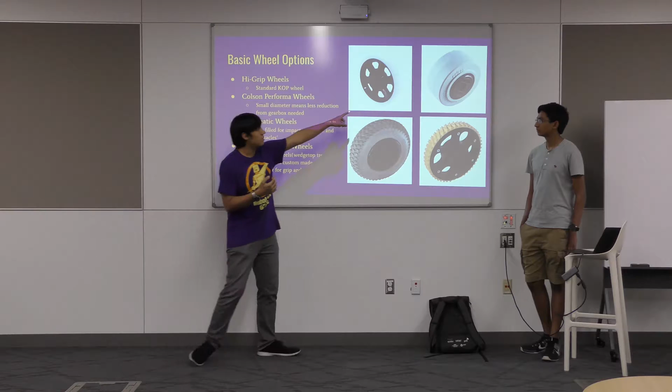In terms of wheels, there are tons of types out there. What we have in the robot, what we've used previously for the most part, are the high grip wheels, which are these ones right here. The diameter varies to 4 or 6 inches, but the important thing is at the outside there's a rubber tread, and it's really high grip, good for traction.

Then there are Colson wheels. They're generally smaller and have a lot of different width options. They're also fairly high traction.

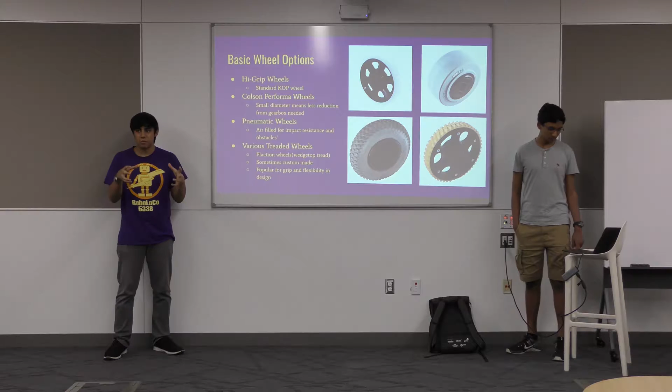Pneumatic wheels — these ones right here — are what they sound like, they have air filled inside of them. Chassis with pneumatic wheels can withstand a really big bump because they can bounce a little bit, so depending on the challenge, you might want that.

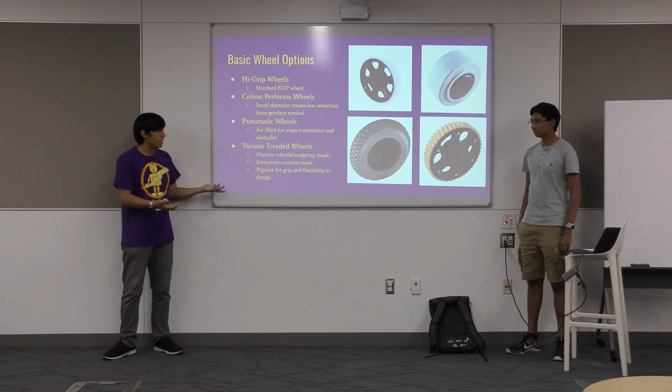You can put whatever kind of tread you want on certain wheels, not only for your chassis, but for other stuff as well, depending on the surface.

The first and most basic drivetrain we're going to look at is the tank drive. It works like the tank style of control, where you have the left side working together and the right side working together.

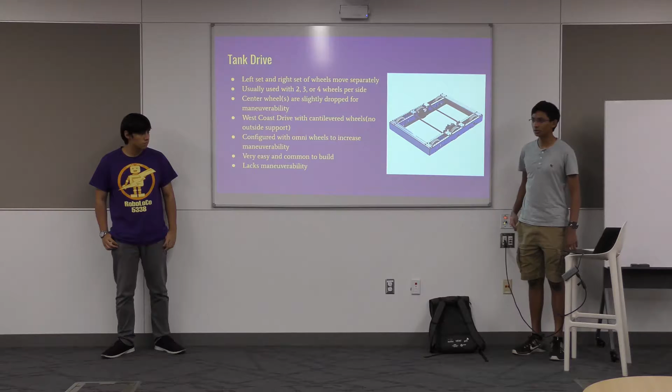So one joystick will be paired to each of them. Usually the center wheel is dropped slightly more than the other two, so you don't have too much friction on the ground at one time, and it helps with turning.

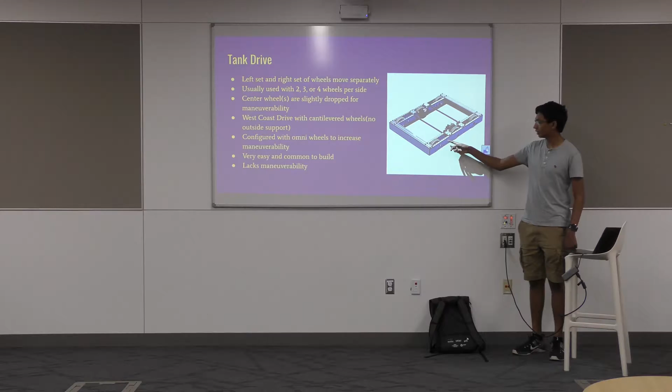There's another style of drive called the West Coast variation of the tank drive. It's what we normally use, where instead of having this side plate, it's just left open, so the axles are just put at the end. Sometimes, if the challenge requires it, we can put omni wheels on the ends, and that will allow you to turn a lot easier as you don't have as much friction from that side.

The advantages of this type of drivetrain are that it's very easy and common to build, and there's lots of resources for it. But the issue with it is it lacks maneuverability, as it's a lot harder to control for the driver. It's also pretty high traction depending on the wheels that you use.

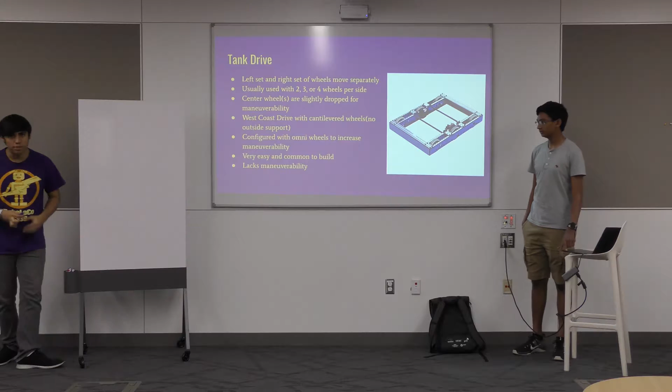And what Ritwik said about the center wheels being lower, center drop is pretty common. The way it works, just real quick: if this is the side of your chassis, if you put your center wheel lower, and then these two outside wheels slightly higher, whenever it turns, only the two wheels in the center are going to be touching the ground.

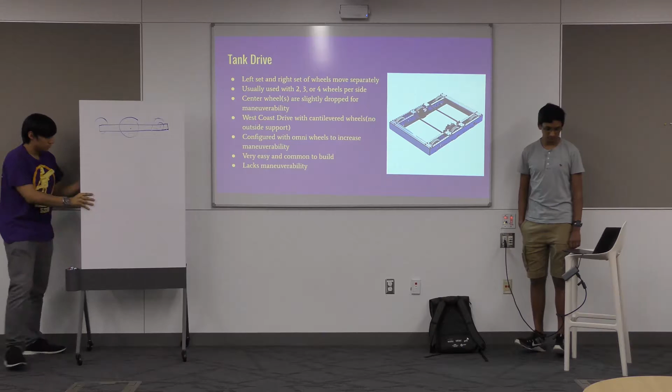And so that's what he means by it'll be easier to turn. It'll give you that slight maneuverability, and then these two wheels only engage forward and backward. So it's a way to kind of make tank drive a little bit more maneuverable. And then you can configure tank drive with 2 wheels on each side up to 4 wheels on each side, depending on what you want.

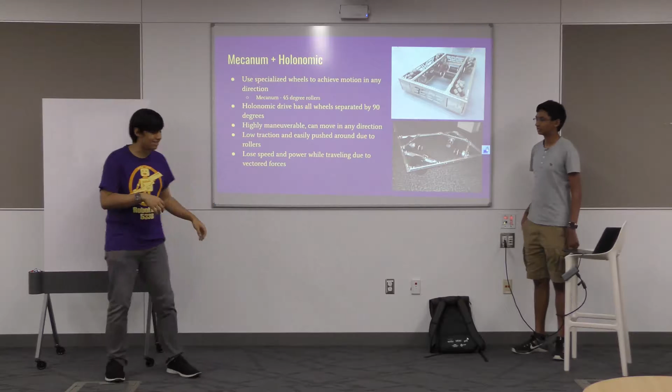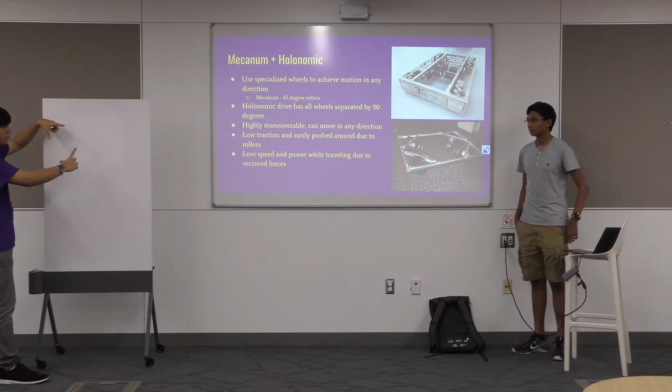Basically, because they're at a 45-degree angle, by using different combinations of them on each corner, you can make your robot move in a lot of directions. Essentially, you can keep your chassis oriented one way, and by turning your wheels forward and backward and side, you can get it to slide around. Yeah, it can move and turn in any direction, and you can move while you're turning too, so you can do arcs and stuff around the field.

Yeah, so it's high maneuverability. The problem with Mecanums is that your chassis has to be really flat. It can't be slightly bent, which might happen as a result of the building process. We've tried it before, it's a bit difficult on our programmers as well.

Holonomic drive is a similar idea, except instead of using Mecanum wheels, which have the 45-degree angle, it uses omni wheels, which are basically the exact same thing, except instead of being at a 45-degree angle, it's in line with the tread. It's just 2 sets of wheels with little rollers following the direction of the wheel, and it achieves the same effect, except it takes a little bit more internal space. So it's a bit easier to do than the Mecanums, I think.

But here all of the wheels are 90 degrees to each other, one in each corner. So like we said before, high maneuverability, but they get pushed around really easily. That's why we might not always want them, depending on the challenge. We have to really settle into a role if we wanted to use these. And with Mecanum, if you're moving sideways, you're turning the wheels against each other, so you lose a lot of force to friction, and it's a lot slower.

Oh yeah, so swerve drive, some of you might have seen the modules earlier. It has the ability to rotate the wheel 360 degrees while also spinning the wheel at the same time. So it gives you the same range of motion as the Mecanum wheels, except since the wheel is spinning to go with the direction that you want, it gives you full power in that direction, so you don't lose any traction or power. So you can play defense just like a tank drive, essentially, except still have the maneuverability of a Mecanum or holonomic. The issue with this is it's a lot more difficult to implement, a lot more complex, so we haven't really used it yet.

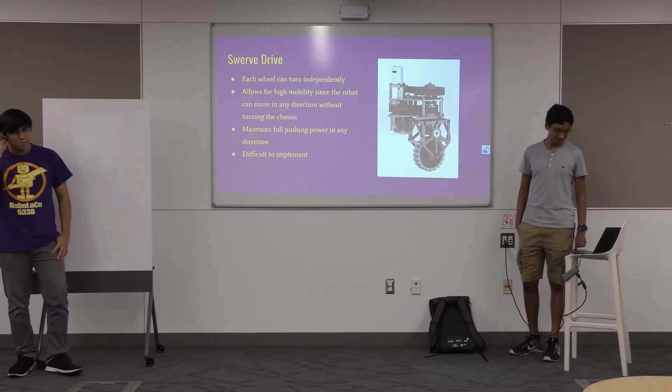Yeah, we've tried to use it in one of our off-season competitions. That's one reason the off-season competitions are really useful, is because there's no actual consequence to losing or winning or whatever. So we can really try out different concepts during them.

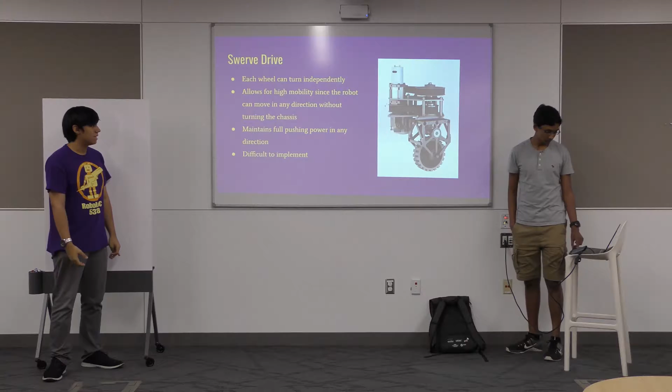And in this case, swerve drives are pretty expensive, and they're really difficult to implement, in terms of the coding and the building and all the design that has to go into them. But if a team makes a good swerve drive, it can really help them during the competition.

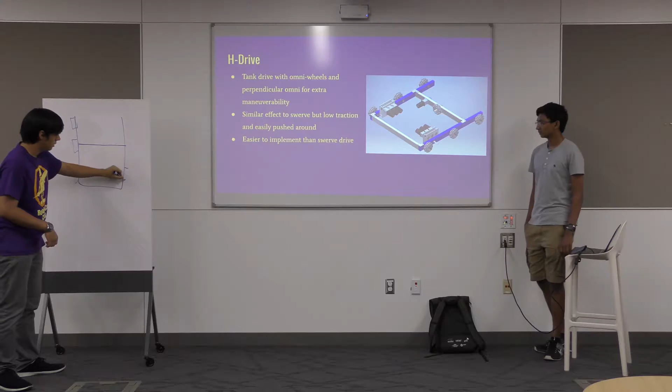And H drive - we've talked about omni wheels before, and essentially the reason it's called H drive is because if I have my chassis like this, there's a wheel here, wheel here, wheel here, wheel here, wheel here, and then there's a wheel sideways in the middle.

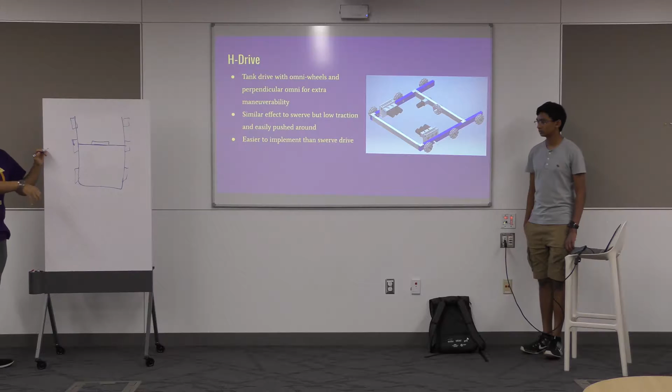Since omni wheels have rollers facing into the direction of the wheel, they have traction going forwards and backwards, but no traction side to side. That's why we have the sideways wheel - also an omni wheel. It can move side to side, but not forward and backward. So in this case, you can get away with this and have many angles covered.

Downsides to this, I would say, are you lose a little bit of space with the middle wheel, but you do get a lot of maneuverability with it. It's really easy to make, but you don't have high traction, so you'll be a pushover, literally, if you make this chassis.

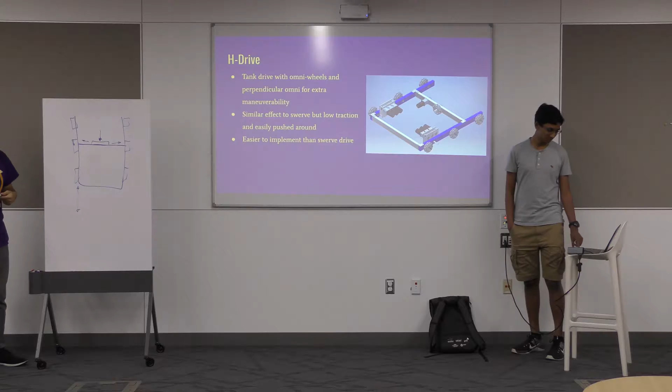Then there's a lot more exotic drivetrains we can look into. These use pistons that push down a system with two wheels - one wheel is usually like an omni wheel or Mecanum wheel, and the other is traction. So it gives you tank drive, but you can switch into omni or Mecanum drive.

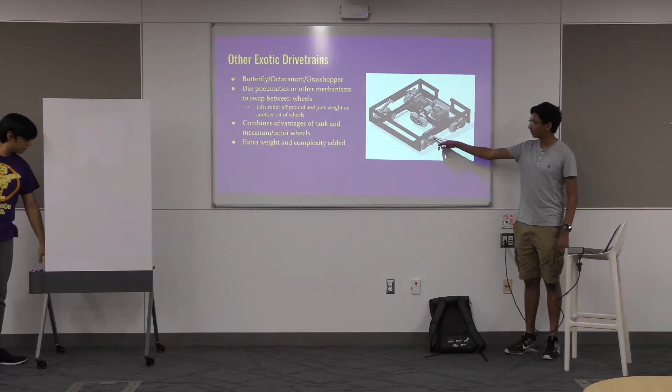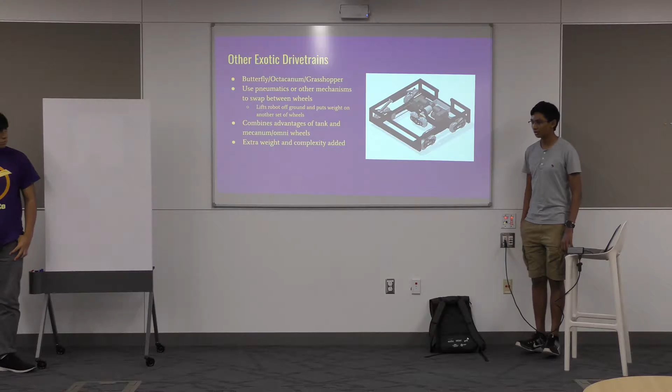With these wheels being pushed down, it lifts the rest of the robot up a little bit higher. So it gives you both the tank drive, and if you want to switch to mecanum or omni, you can do that. The issues with it are it's really complex to implement, and there's a lot of extra weight that comes along with it.

Yeah, so if you look at it, it's extremely bulky. Unless you need this for your strategy, we probably wouldn't do it, just because we don't have that much experience with it either.

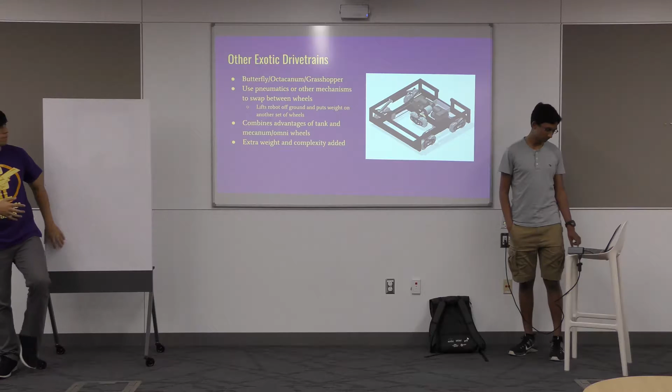With the hopper, you want to guide the balls - you can have it gravity fed where the bottom slopes down to one corner, and that's where the shooter is, so the shooter can pick up the balls from there.

Or a lot of teams have active methods to move the balls around and serialize them. One way is a series of belts that go along the length of the base of the hopper, pulling the balls to one side. Or some teams have a giant rotating sweeping arm around the base that pulls the balls to one side or corner.

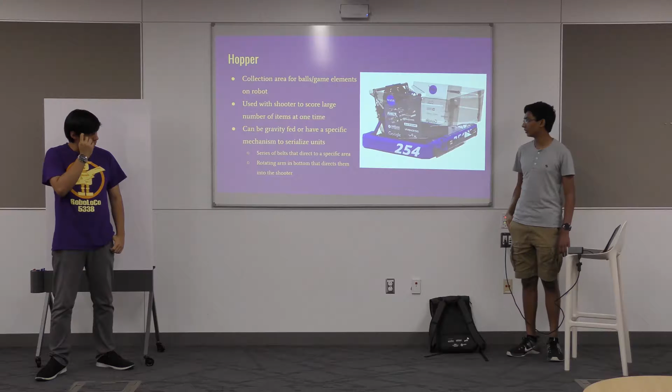One thing to keep in mind: you can have a ball shooter, and it's pretty easy to make - you just get the wheels spinning, feed the ball, and shoot it. But this is all about how do we get the balls to that place in the first place.

With a hopper design, a passive hopper just exists and funnels balls into one place. The way you'd get balls into this is usually from some sort of loading station. In past games, to put game pieces onto your robot, there's usually some place where a human can put pieces into the robot. Sometimes the balls fall to the ground, and this would not be a good design for that because of how it's designed. But we'll get to that next.

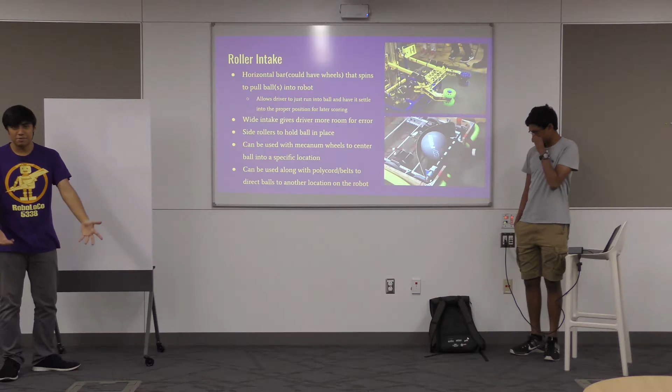If you want to pick up from the ground, because a lot of times the balls will fall onto the ground, you want to use some sort of roller intake.

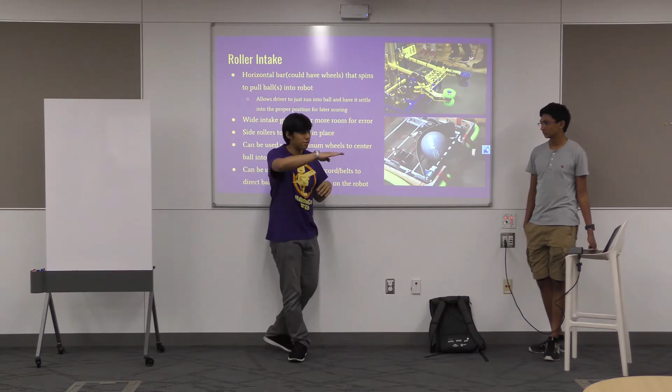In terms of a horizontal bar, that would be this one - a bar placed parallel to the ground, and it spins, and it's at the height of the top of the ball. So when any ball rolls into it, it just gets sucked into wherever you want it to go, and that could feed into some other system.

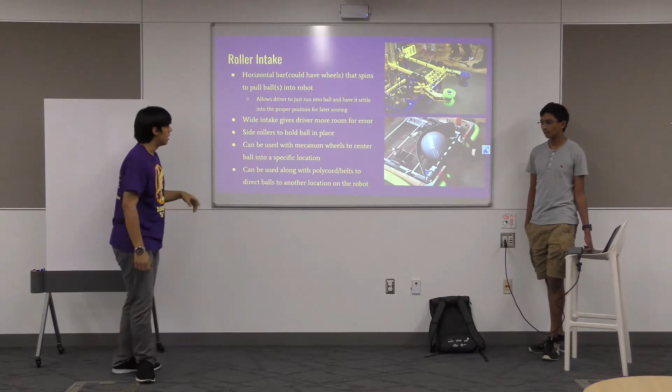A wide intake is really useful because you don't have to be that precise. Driving the robot isn't the easiest thing, especially if you can't see where it's going too well. So this intake is slightly wider than the ball, just so the driver can be pretty confident in their driving.

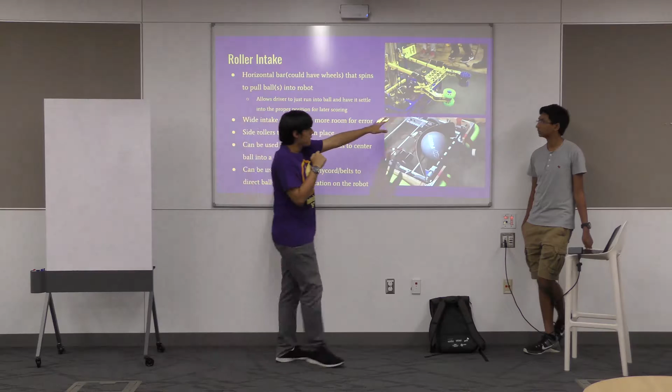Side rollers, like this, can be useful for balls, but also for larger things. If you want to pick up a single object at a time and raise it up high, you would use something like that. It's pretty versatile in terms of what you can use it for, and it's not the most difficult thing to build.

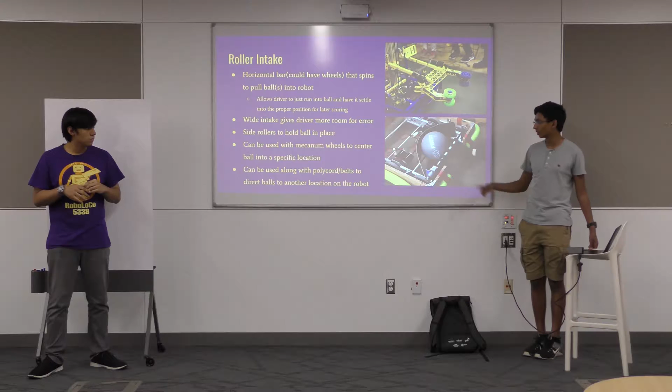With both of these, you can substitute a plain bar that has some sort of grip on it, like a PVC pipe. You can put compliant wheels on it, those rubber wheels we saw earlier that grip the ball. Or you can use mecanum wheels, which help center it to a specific point. A lot of teams use this in conjunction with this type of intake, so it sucks it straight into the robot, and this holds it to a specific position, which helps with scoring.

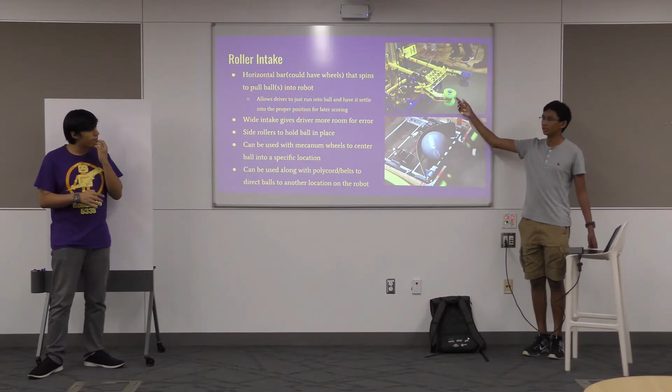There's another variation of this called an over-the-bumper intake. That will actually extend out of the robot, using the bumpers as a back surface to pull the ball up. That helps with saving space on the robot, as you can move your holding mechanism further to the front and have the intake on the outside.

If you have your ball or scoring element in place, you want to be able to move it to a higher position. You would use something like an elevator or an arm. First is elevators: the goal of an elevator is to raise a series of stages vertically in one axis, using a system of pulleys with either chain or some sort of cord.

One issue with elevators is that the stages can sometimes bind up because of the weight and friction between the bearings and the bars. So sometimes we use a constant force spring, a piece of bent metal that pulls down with a certain force. This opposes the force of gravity on the elevator parts and makes it easier to lift up and down by the motor.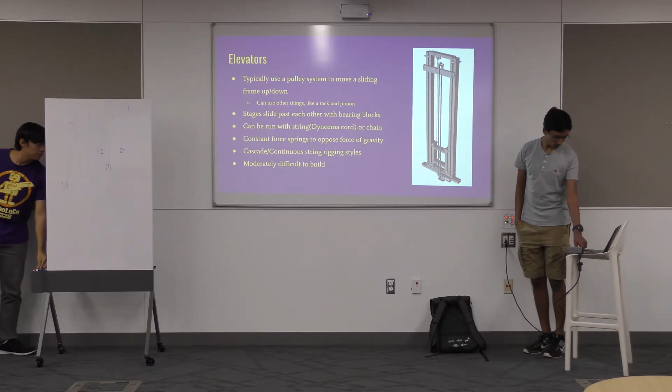And arms. Arms are an alternative to an elevator, depending on how you want to make it. They can be made out of metal, polycarbonate, whatever.

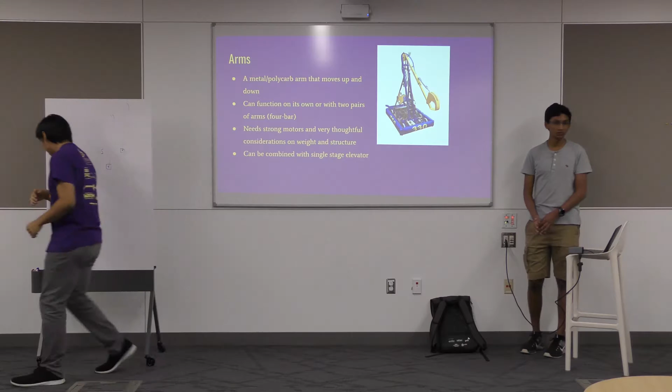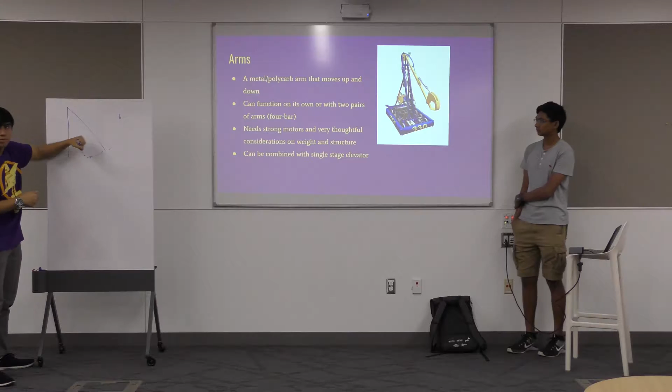So what that second bullet point means is that you can either have a single arm, or you can be clever with arms. You can have one arm, and this arm can swing up or down. But if I have a mechanism attached on the end of this, the face of it will change to whatever angle the arm's at.

If I have 2 arms, and I attach a plate to the end, and both of these can roll while the whole thing goes up and down, which is what we did on a robot this past year, this end plate will stay at whatever angle you set it up in. We set up ours to be perpendicular to the ground, so it would always face like this. With 2 pairs of arms, you can achieve that.

This is called a 4-bar mechanism, because from the top view there are two bars per arm, and then there are 2 sets of this.

One of the advantages is it's not hard to build, you just have a strong motor and an arm, and you're done. But the motor has to be strong. You're going to make your arm as light as possible, because the more weight you put on the end of the arm, the harder it is to control, and the stronger your motor needs to be. There are limits on all that.

So there are good sides and downsides. We went for it this last year because it was really simple to build, just a motor and the bars, but it had its own problems. You can combine arms with a single stage elevator, depending. You can have an elevator and a small arm on the elevator, or however you want, combining a lot of these mechanisms together.

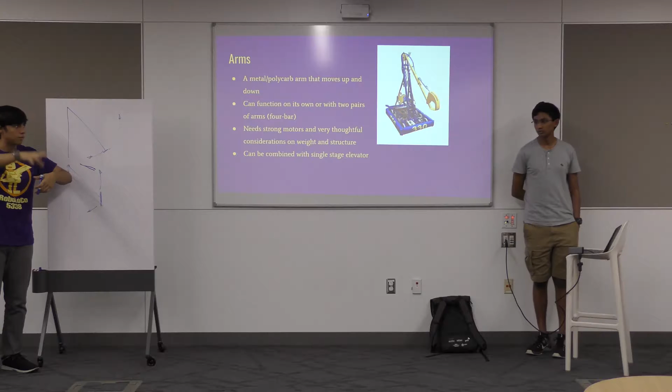So as homework, we will send out links on Slack for a bunch of robot reveals and sources where you guys can get inspiration for your own mechanisms. Start thinking about this, because we don't want to just tell you guys, hey, if you had this challenge, what would you do, without at least getting some exposure to previous challenges first. We're going to give you some challenges, nothing too complicated, and just throw out any ideas or discuss among yourselves what you'd do for this challenge.

So, number 1, the challenge involves taking a large cube and being able to score it in several locations of varying height. So you have a cube like this, and you have to put it on different platforms. The higher the platform, the more points you get, and the more cubes per platform, the more points you get.

Let's do this: bottom one is 2 points, middle one is 4 points, top one is 12 points. What kind of chassis sort of thing, what kind of mechanism would you want to do? Let's give some heights: this is 0 feet, this is 3 feet, this is 6 feet.

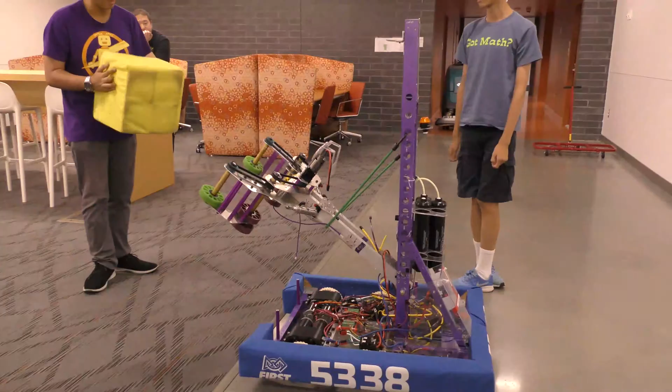This view was loosely based on the challenge from two years ago. So here's a cube, you're supposed to catch it. Okay, all right. But this was our robot for that challenge, so here you can see some of the things that we did. What are some things you recognize on the robot?

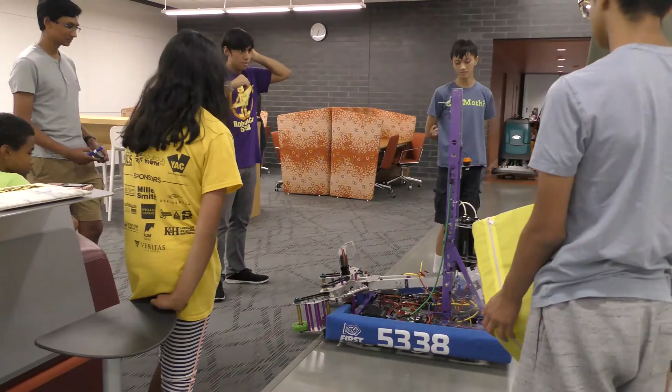Compliant wheels. Yep, what else? What about the chassis? What do you notice? Just a standard tank drive. It is a tank drive. Does anyone know why we'd have omni wheels on the back?

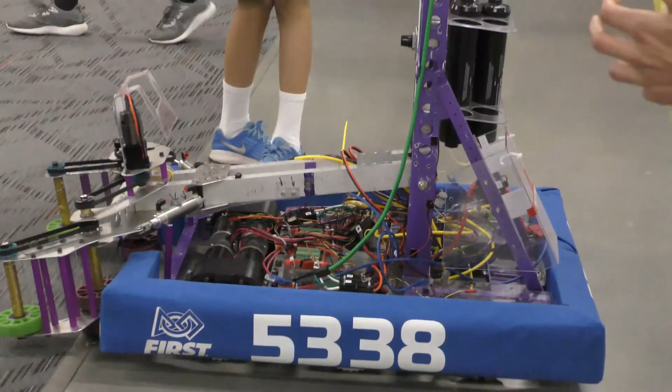So usually when we do a tank drive, we have the center dropped, right? So that way when it turns, it turns really quickly. In this case, we didn't have that. So why would omni wheels help with that?

Because of the wheels. Yeah, the wheels don't have any friction side to side. So the correct term is wheel scrub. When you have 6 wheels and you try to turn, the wheels will literally scrub across the ground. That's what is preventing wheel scrub. And it worked pretty well.

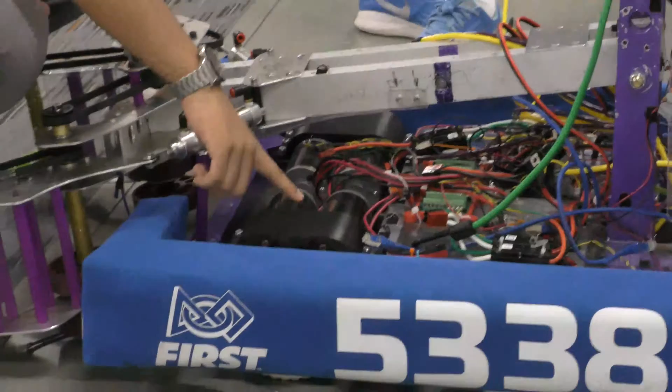And in this case, you can see we just have the 4 motors, and they're driving each side. This chassis uses belts across the whole thing. You can see them under there to just connect each side up. In the front here, you can see in more detail the compliant wheels.

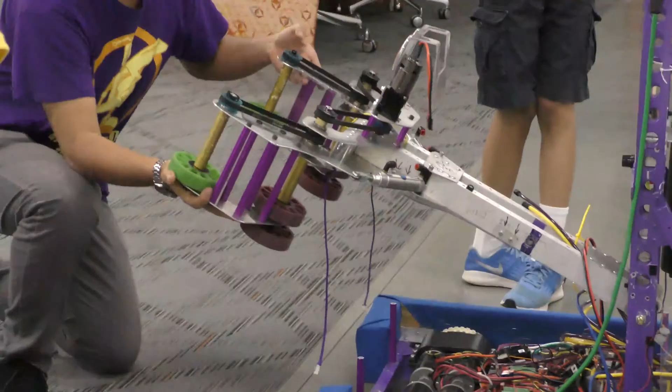So what we had in this case were a motor on each side. They spin the wheels in and out. These pulleys on the end are 3D printed. And we use that to grab the cube.

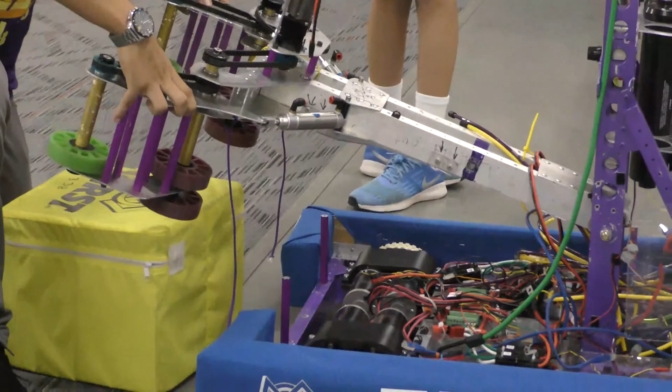So when closed, we have pistons out here, right? This is what I was talking about a little bit with the pistons. So when the piston is fully retracted, it's open. When it's fully extended, it snaps into place. And that was able to just drive up into the cube. Because the wheels are fairly big here, we didn't have to be super accurate with the motion because it would just sort of suck the cube into the right spot.

But yeah, so you guys thought of a robot more or less like this. A lot of teams used an elevator. We did not. And we fixed it a little bit by shooting the cubes instead. It wasn't perfect though. So that's what a robot for a similar challenge would look like. Anyone have any questions on the process or anything?

Let's just pretend that's the thing, and then we have 3 foot, 6 foot, 8 foot. The field, same thing, each driver on either side, and then in the middle, there is one pole for this side, and then there's another pole for the other side.

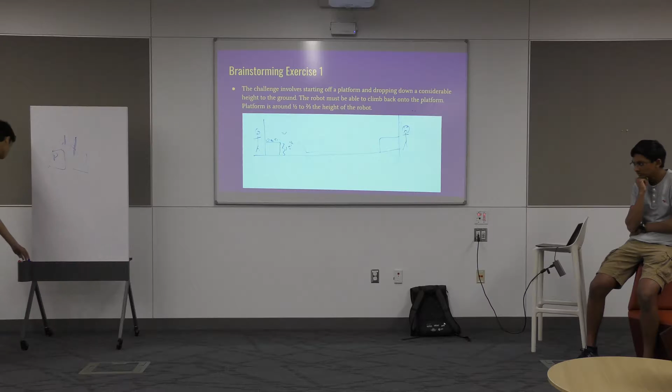Just simply add something like here, and then add, and if you had the arm here, it would just kind of extend and then maybe push against the ground. Yeah, push it against the ground.

Could you use pistons on the bottom of it to push off the ground? You can use pistons. How would that look on the robot? There'd be a lot of pistons on the chassis. How would it be oriented? Facing down? Do you want to put them all over the chassis, or where do you want to put them? I don't know how strong the pistons are.

Let's forget about that. I would put enough so that it works around, spread them evenly around the place. Maybe 2 on the back. Since you only have to have the front part up, this arm is going to easily lift this front bit, so the robot's going to incline, right? You only need pistons on the back, so you can put a couple pistons here. They have to be pretty big, since that's the point when they push down.

Okay, let's pretend the robot is here, this is the ground. Let's just say your robot is up in the air, the piston is touching the ground. Now what? No, because they've been on the team and they know the answer to this particular question.

There's many ways to do this, this is just one of the ways. Never mind, you can say it after. You can have wheels at the bottom of the pistons on the arm, need it? All right, and then what? You need probably the one on the arm forward.

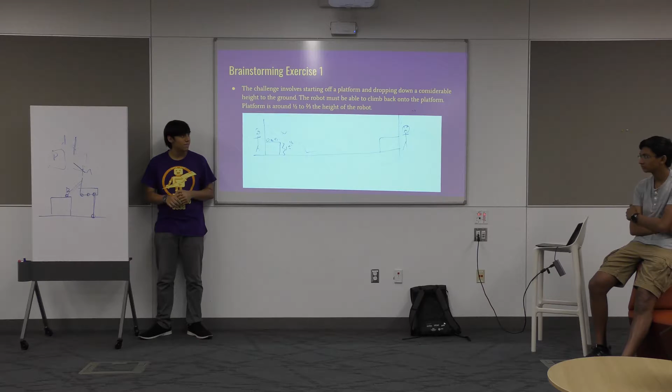Okay, let's think of some other ways in the meantime. Instead of having the arm in the front, could we use 4 pistons on each corner? How would you drive it then if you can't have motors on pistons?

One thing to say with this design is that it works pretty well, and once the chassis wheels touch the platform, once it goes that far, these can just drive. So knowing that, how do you get 4 pistons to work?

This would begin down here, and you would push it up so this could move a little bit forward. You're onto something, but the one problem I see with this is that this one going straight down would completely counteract this one going diagonally up. So if this was going down and this is going up, it'll make it difficult. How would you want to do it?

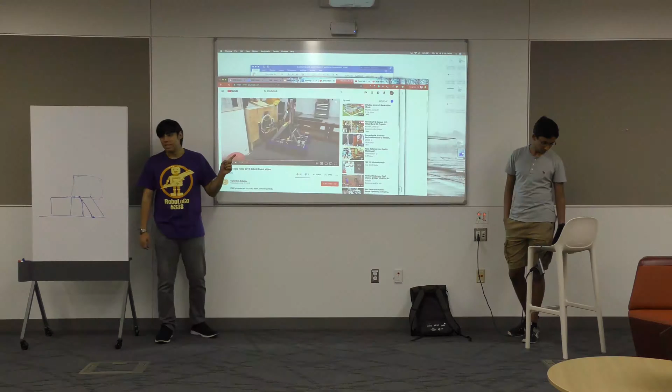Then they fall onto the thing. The downside to that design is that they can only fall onto the third step. Does anyone know why? They can only fall onto the top one, why can't they fall onto the lower one, the middle one?

Because their robot only falls over after a certain distance. Well, they can still extend and then fall onto the second platform. Why did they have to fall on the top one? Why can't they do the second one? Because the metal part that supports that first point, they will probably fall.

That might happen, but also it's too much of a height for it to drop. If it's designed to only fall a little bit to the third platform, and it does the same thing falling to the lower platform, then they'll actually take damage, and that would not be good.

One more just for inspiration, a bit more consideration. Yeah, okay, so in this case, this middle robot is holding up two other robots, and they're all climbing together. That gave you a ton of points, and you see it a lot at the higher levels, because it's not something easy to pull off.

The way they do it is really simple, just have big platforms, like little wings. So they get the points for all 3 robots? They get the points for all 3 robots.

So in this particular challenge, climbing, if you didn't climb at all, it was 3 points at the end of the match. If you climbed to the first low step, it was 6 points, and the top one was 12 points, so this would give you 36 points, which is crazy.

Especially when the average match score was like 60-ish. Your average match was 60. 36 is a lot, so yeah.